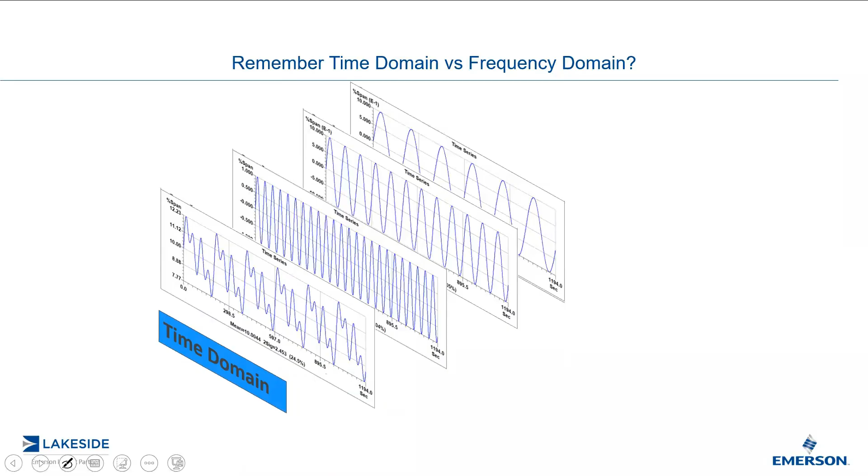So let's say we have this one cycle here, and then I'm going to add this cycle, and then I'm going to add this cycle at different frequencies. If I add them all up, this is what it would look like. And this is what we call the time domain. You take a look at it from a data set and the trend and so forth. That is the time domain.

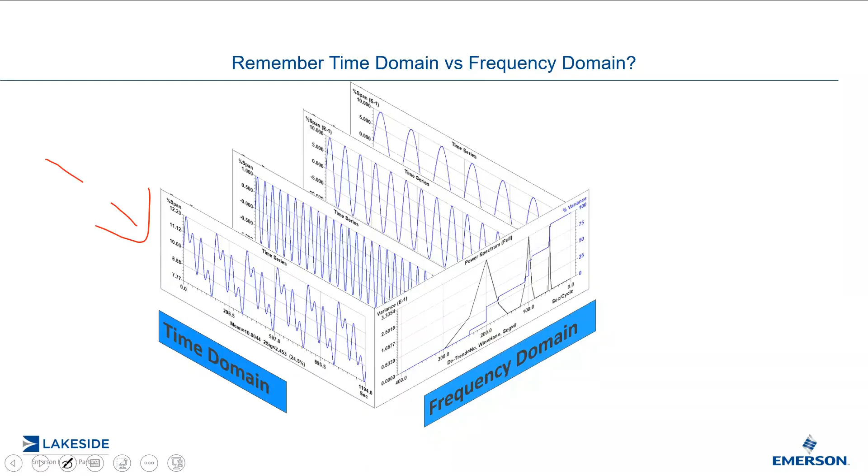However, we can look at that signal differently. We can take the power spectrum, a fast Fourier or full Fourier analysis, and that will break down this signal right here into fundamental harmonics. It was said that pretty much any time series can be reproduced by adding an infinite amount of sine waves and cosine waves of various amplitudes. And so here it'll break it down into various components. You can see the three major harmonics there.

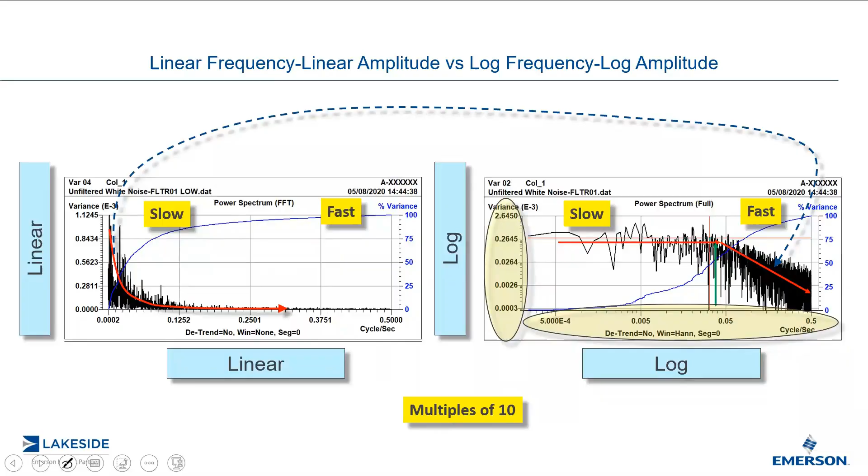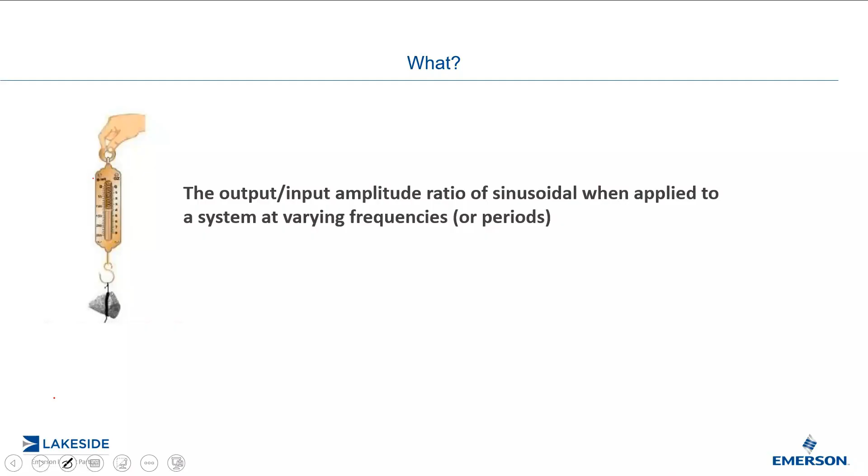So what is frequency response? Let's say I'm holding, now I know that looks like a scale there, I actually really wanted to have a spring, but I couldn't find a proper image, so just pretend it's a spring. So I will have a process input. My hand is going to move up and down, and I will observe how the rock will behave in terms of amplitude. And the ratio of the movement of the rock divided by the amplitude of movement of my hand will determine the frequency response as I vary the frequency or period.

It's interesting because we talk about frequencies, and really it is frequencies, but as I've mentioned in my previous webinar, in the field of process control we don't deal with hertz, we deal with seconds or minutes per cycle, which would be millihertz and microhertz. It just sounds better when we talk about 15 seconds, 15 minutes per cycle, as opposed to almost 1 millihertz.

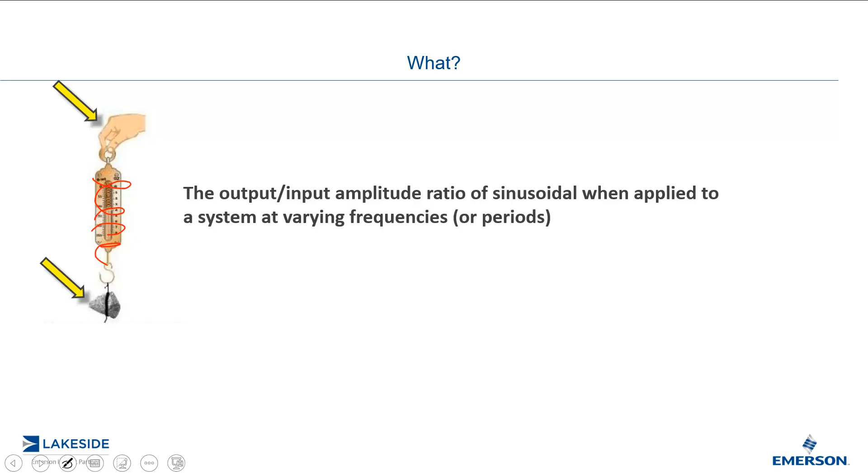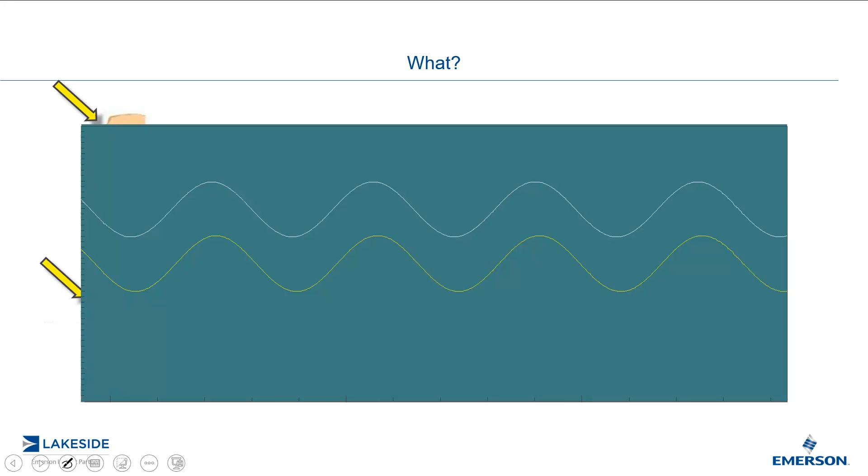So if I were to now move that system up and down, my hand is basically going up and down like the white line, and I would observe the movement of the rock. If I do it slow enough, they seem to track each other pretty well. So now we have a ratio of 1 in terms of amplitude. Now, if I change it a little bit faster, the rock is still tracking the movement of the hand, same amplitude, still a ratio of 1. A little bit faster, still pretty good, still tracking the movements of the hand in terms of amplitude.

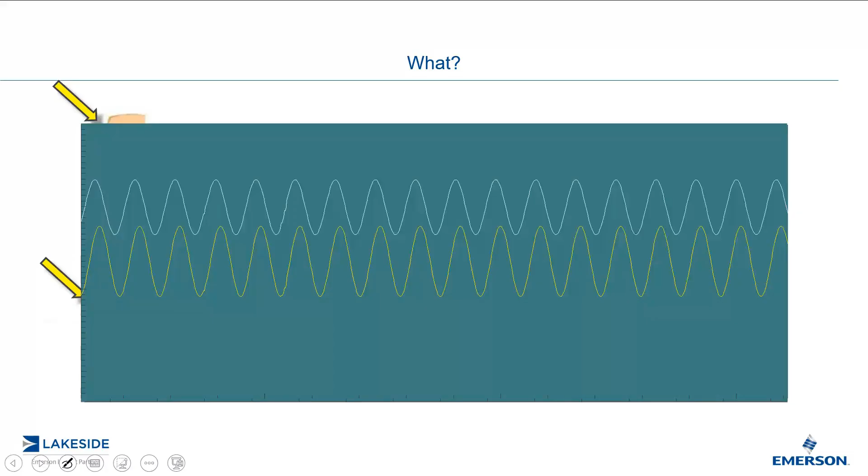Now, this is interesting. I'm moving a little faster now, but now it appears that the amplitude of the rock is greater than the amplitude of my hand movement. So now the ratio would be greater than 1. And if I go a little bit faster, now you can see the amplitude of the rock wave, that sounds pretty cool, is much larger than the amplitude of my hand. So now we have a ratio much greater than 1.

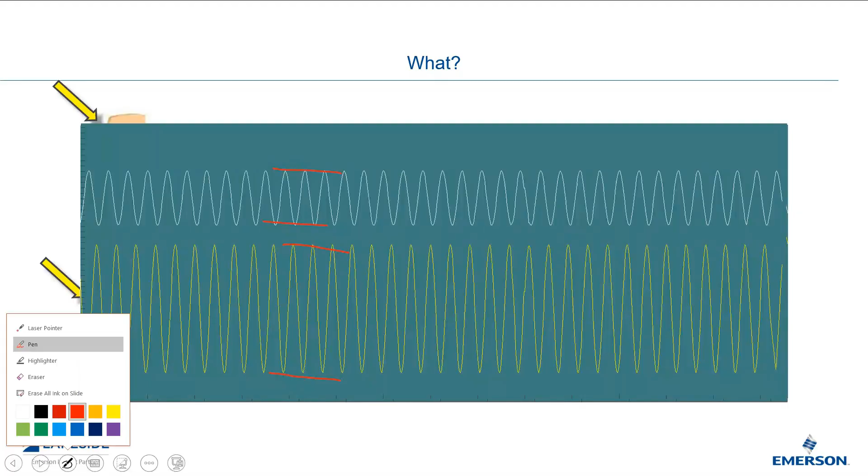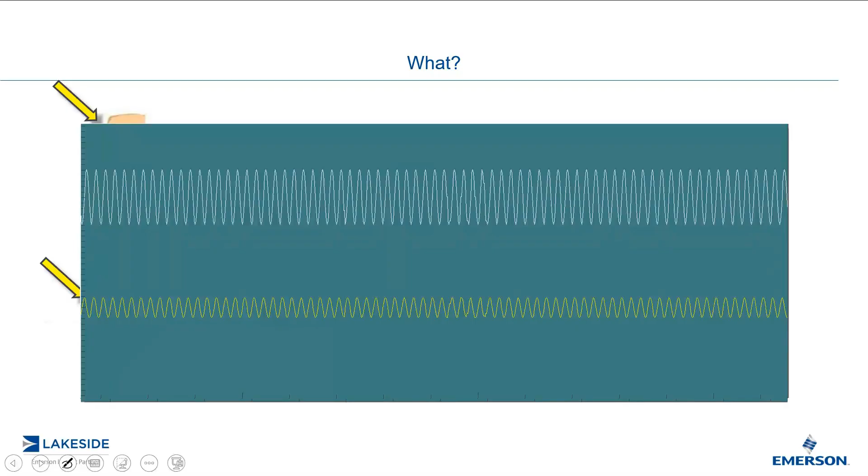That means at this point we're hitting a resonant frequency of the system. The system is actually a second order underdamped response, and we're hitting a natural resonant frequency. Now, if I keep going any faster, the hand movement is going really, really fast, but now the rock is no longer able to keep track in terms of amplitude of the changes effected by the hand, and therefore the amplitude ratio is much less than 1. We're falling down. So therefore the system is attenuating the input signal.

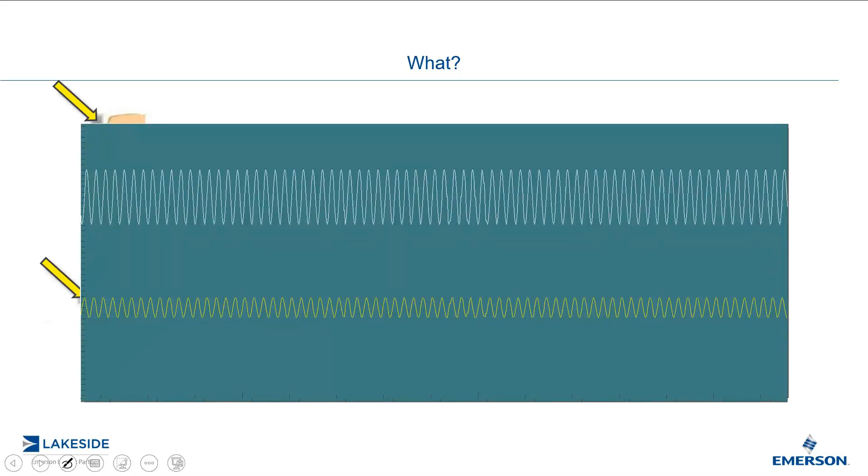Let's talk about filters, low pass filters and high pass filters. Some of you may or may not recognize this. Some of you may have little flashbacks of nightmare. This is an electrical circuit, and I have a resistor and a capacitor. This is known as a low pass filter.

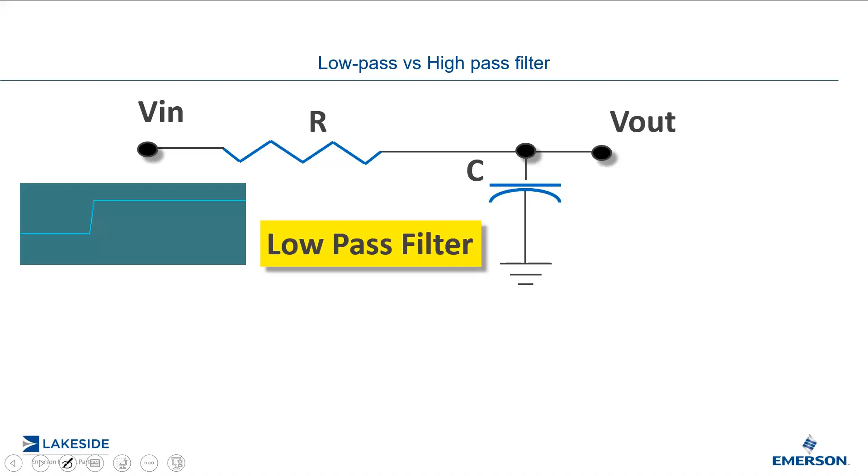So let's look at it from 2 different points of view. Let's look at it from the time domain point of view. If I were to put a step change on the input voltage, what would I observe at the output voltage? I would observe a first order response. Very, very similar to what those of you who've done tuning, or watched me do tuning, or taken my course know. The first step that we do before we do any tuning is a bump test to measure the process dynamics. So this is completely the same.

And yes, the time constant of that response, tau, is RC, the value of the resistance times the value of the capacitor. Now let's look at it from a frequency response point of view. So if I were to put some sort of signal generator at the input voltage, and I was able to vary the frequency, I would observe different amplitudes at the output.

In this case, you could see the frequency is pretty high, and what's happening is that the low pass filter is attenuating the input signal. And hence the name low pass filter: slower variability it will pass through. The amplitude ratio will be pretty much 1. But the faster the variability, the more it gets attenuated. And note my word attenuated, not eliminated.

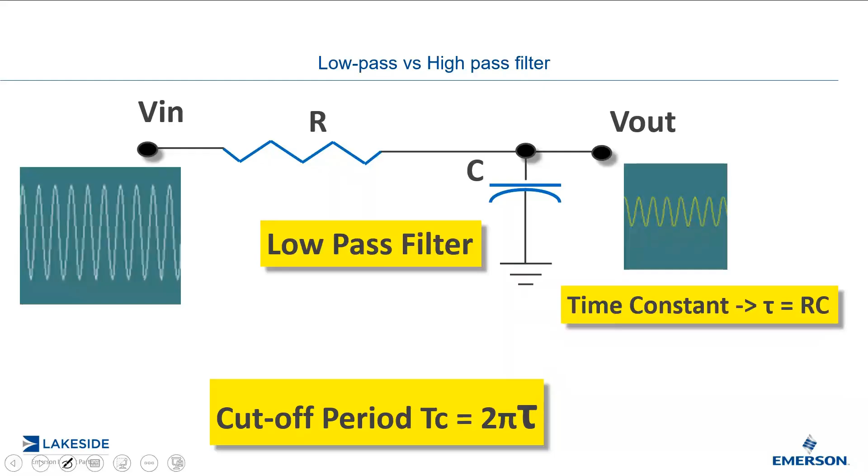It gets squished. And the cutoff period of this low pass filter is equal to 2 pi tau. And why the 2 pi? Because it's more than 1 pi? No, that's how we convert the time into radians per second.

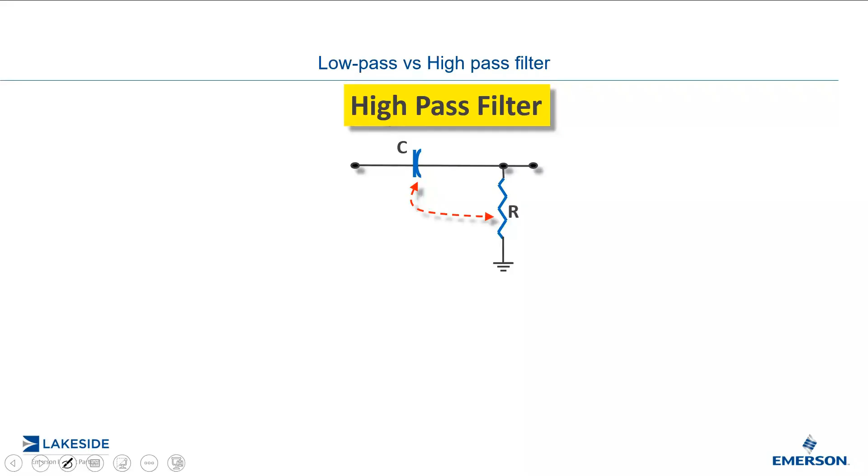So now let's talk about a high pass filter. The high pass filter is essentially where you just switch the positions of the capacitor and the resistor. And once again, if I put white noise through there, it's going to pass through the high frequency components of the white noise and attenuate the lower frequencies.

So you're wondering again, why do I need to do this? I went through the nightmare in university or college trying to forget all this. I'm going to relate this in a minute. So just to recap, a low pass filter attenuates high frequencies, and a high pass filter attenuates low frequencies.

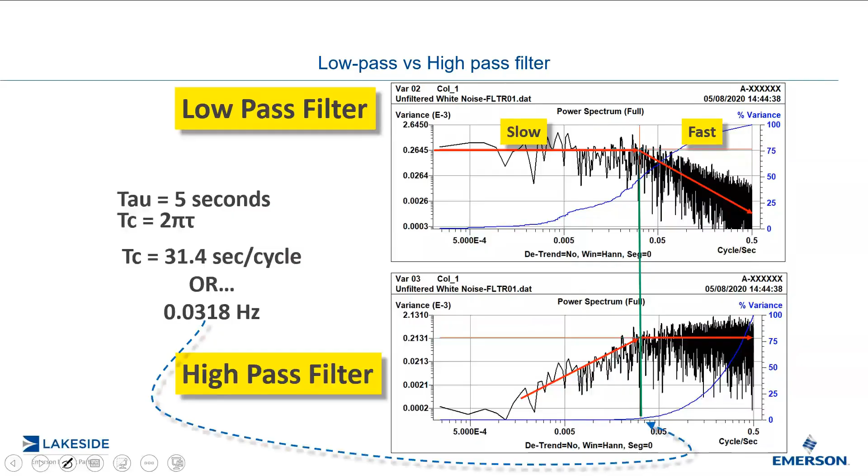So remember I talked about the cutoff period, and we're going to talk about it now for a high pass filter. So once again, for a high pass filter, the cutoff period in this example is 31.4 seconds per cycle, or 0.0318 hertz.

Now remember, our control loops are bombarded by all sorts. It's not necessarily going to be white noise, but it is bombarded by variability that can be from very, very slow types of variability: seconds, minutes per cycle, hours per cycle, days per cycle, seasonality, months per cycle, if you want to go all the way that far. But what does this mean in terms of cutoff period and attenuation? It means that

variability that is 10 times slower, variability at 314 seconds per cycle, 90% of that will be attenuated by the high pass filter. 90%. So if you think 90% at 314, that's over, what, 5 minutes per cycle. 5 minutes per cycle. 10% still makes it through. That's the key concept I want you to actually get.

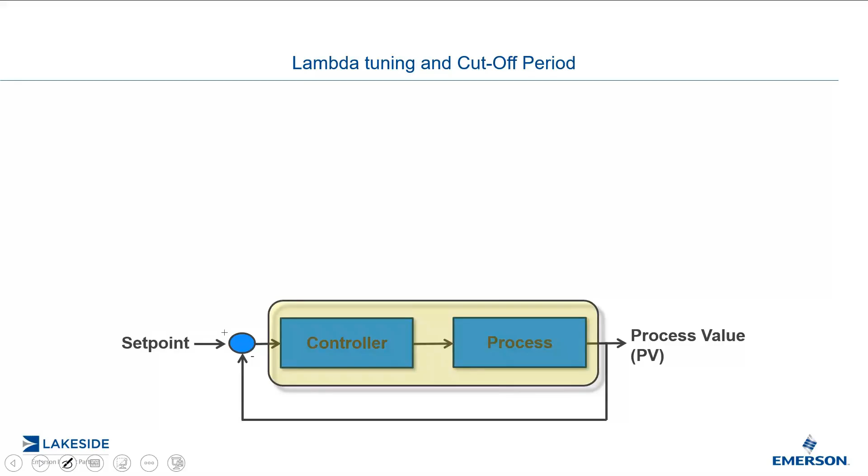So let's relate this now to PID and tuning. So when a controller is in automatic mode, it has specific numbers in tuning. The process obviously has its own dynamics, so we must consider this together. Depending on how we tune it, we can tune it to have overshoot. So it has a bit of overshoot and undershoot. That's known as quarter amplitude decay. It is an underdamped response, similar to the spring in the hand and the rock.

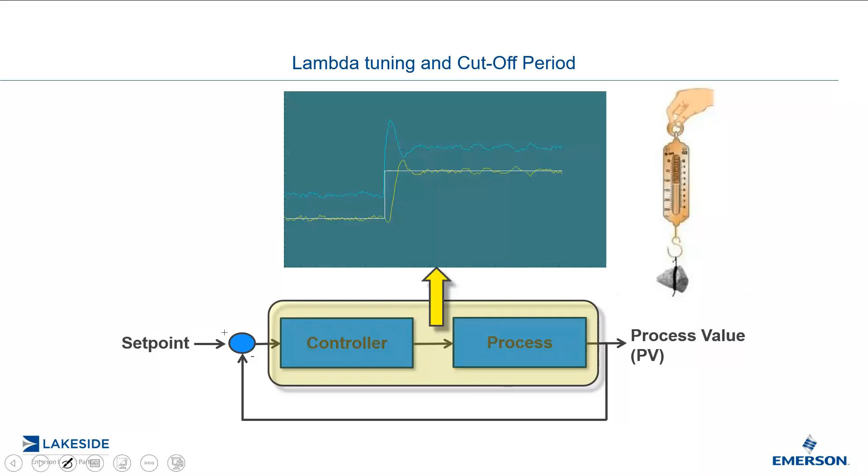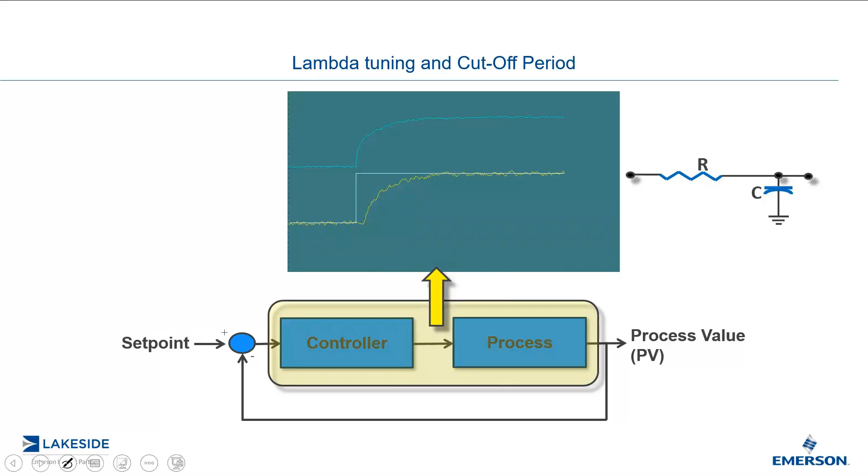Or we can tune it more like a first order response, more like the RC circuit following a set point change. So you can see here, this is the total sum of the PID and the process together. That is now one system. And now we can take a look at that one system and see what is the frequency response of that total system.

So let's say if I tune this with a lambda value of 15 seconds, that is known as the closed loop time constant. It's a fancy word; closed loop means in automatic. That's all it means. That means then that the cutoff period will be 94.2 seconds per cycle, or 0.0106 hertz.

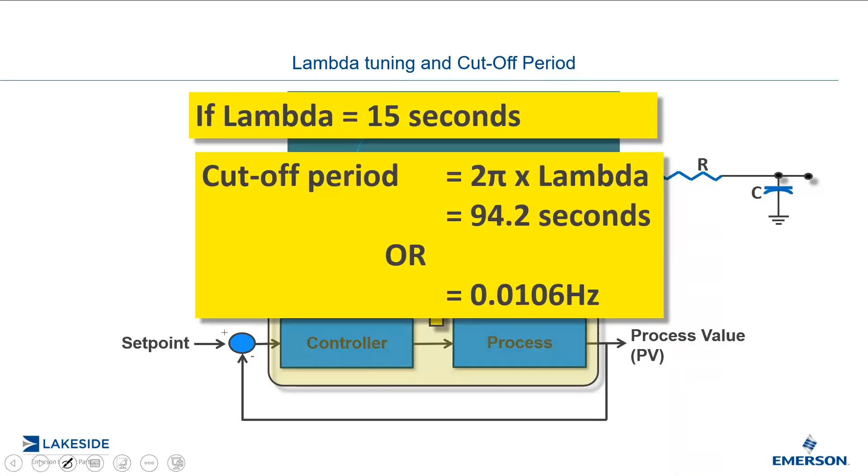That means that variability that lives at 942 seconds per cycle, 15.7 minutes per cycle, 10% of that variability at that frequency will pass through. It's quite amazing. It's a little bit hard to grasp that, but it's very true. 15 minutes is a long time.

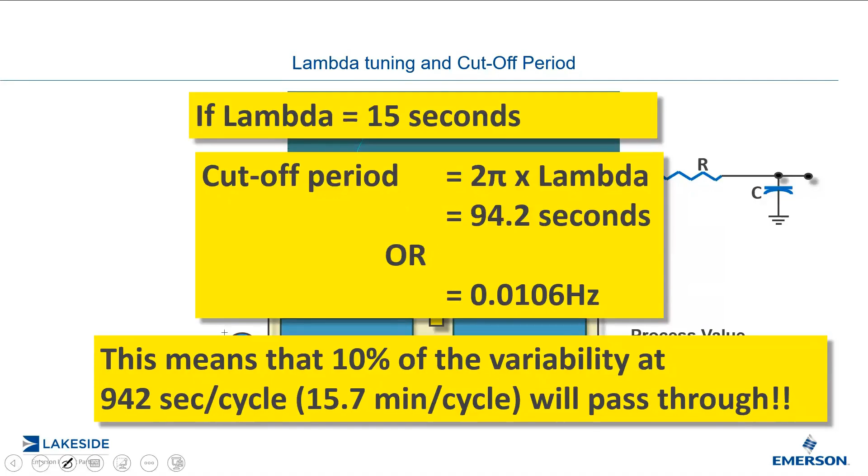And if I were to vary the set point very quickly, then the amplitude of the PV would be a lot less because it will have a hard time keeping up with the fast changing demand of the set point. My point here, from a set point change point of view, it's going to be a low pass filter, meaning slow set point changes will be tracked, fast set point changes will not be tracked so well.

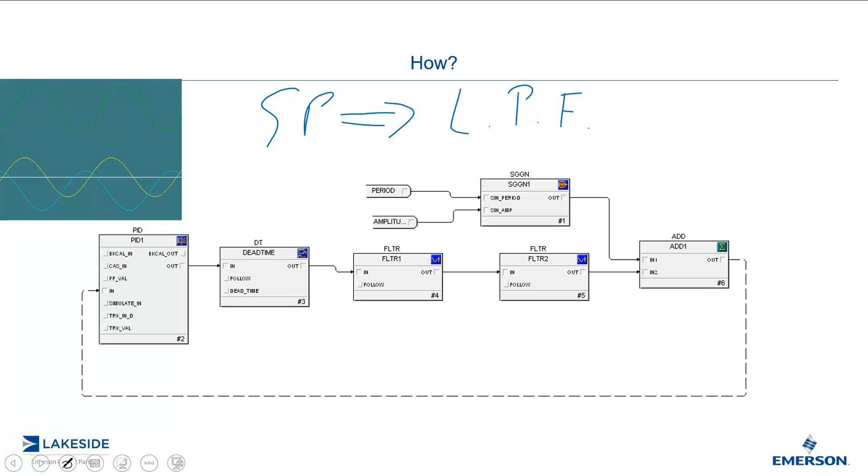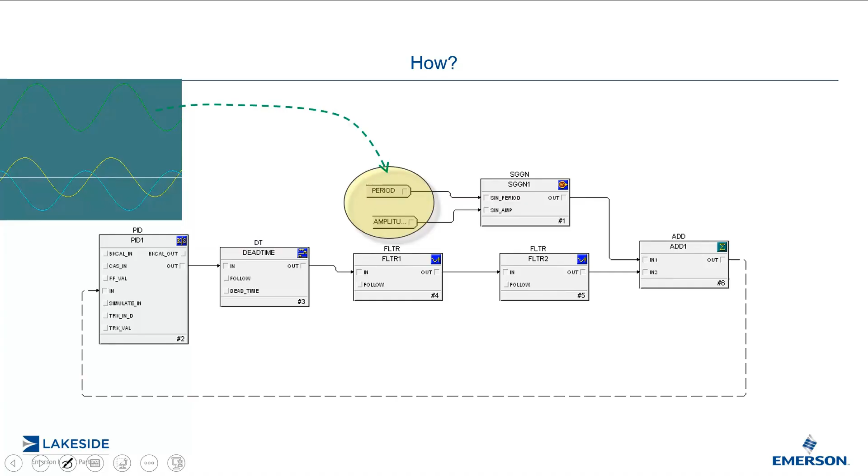But I'm interested now in the load rejection aspect of the PID controller. So what I'm going to do is change the period of that cycle, add that to my signal, and then observe how well my PID controller rejects the varying frequencies of load disturbances.

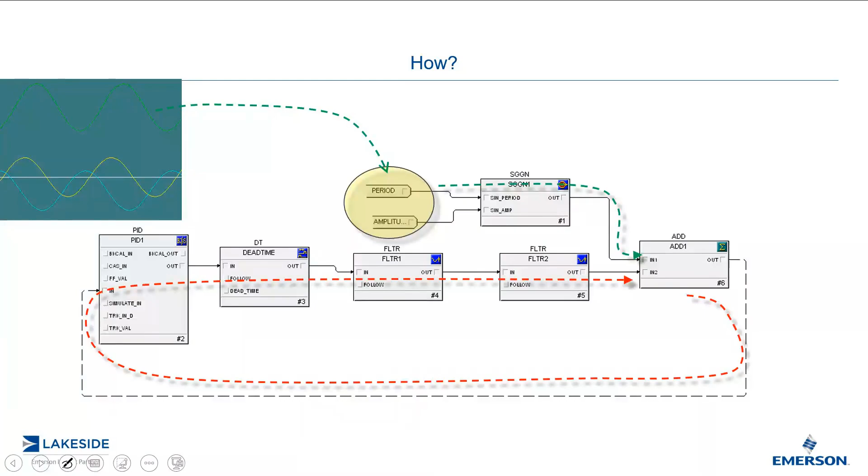So this is known as a high pass filter. From a load rejection point of view, a PID acts as a high pass filter. What does this mean? It means that if the variability is very, very slow, I have no problems controlling that out. But as the variability starts to increase in frequency, I'm less and less able to actually attenuate it, to a point where I will have no chance of attenuating and the variability will pass through.

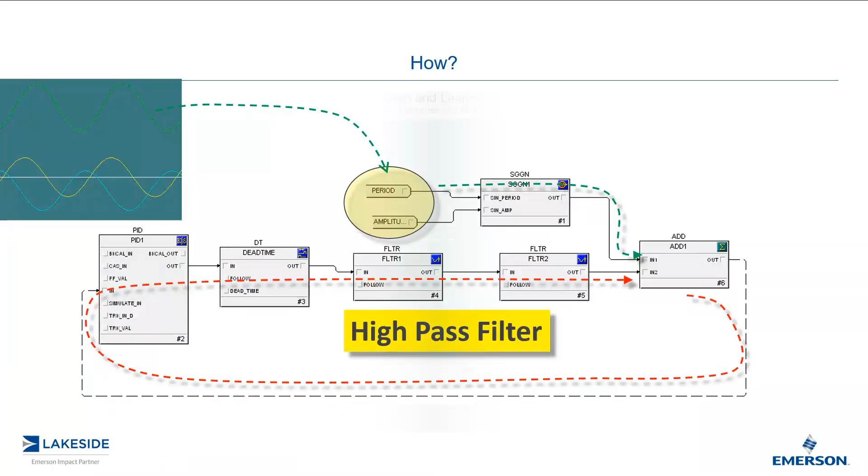So this is what I did here. I tuned this controller and I put it through a cycle of 2,700 seconds per cycle. This is all on the same time scale, all on the same Y scale. So here I measured this, I had a ratio of 0.05. That means that the cycle here was well attenuated.

So maybe I should go back and explain this a bit more. What I have here is the actual disturbance I'm injecting. The blue line you see is the output command of the PID block. The white line is the set point, and the very squished yellow line is the PV.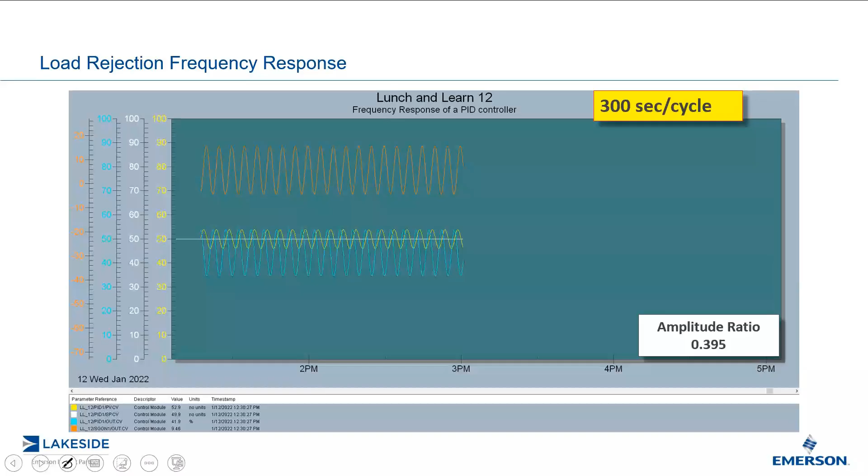400 seconds per cycle, 0.3. 300 seconds per cycle, almost 40% is making it through now. The PID controller is having a very difficult time trying to attenuate that cycle. 250 seconds per cycle, 0.465. 0.565 for 200 seconds. 150 seconds, 0.71. Now we're reaching the cutoff point, but something interesting is going to happen here. 100 seconds, 0.925. That means it's only attenuating 7.5%.

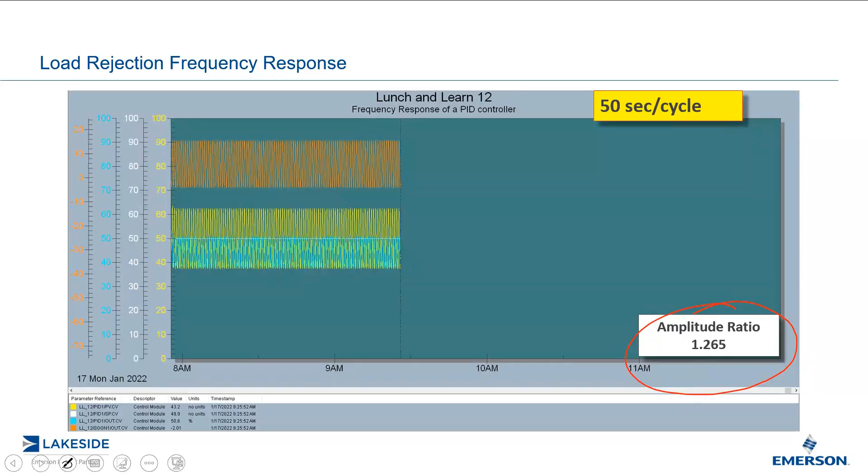Now, 50 seconds per cycle, this is interesting. The ratio is actually greater than 1. That means the PID controller is actually amplifying that cycle by 26.5%. The reason for this is that even though I tuned it as a first order response, I lambda tuned it, any process that has any kind of dead time will have some sort of natural resonance, no matter how you tune it. And this is what I wanted to show you here.

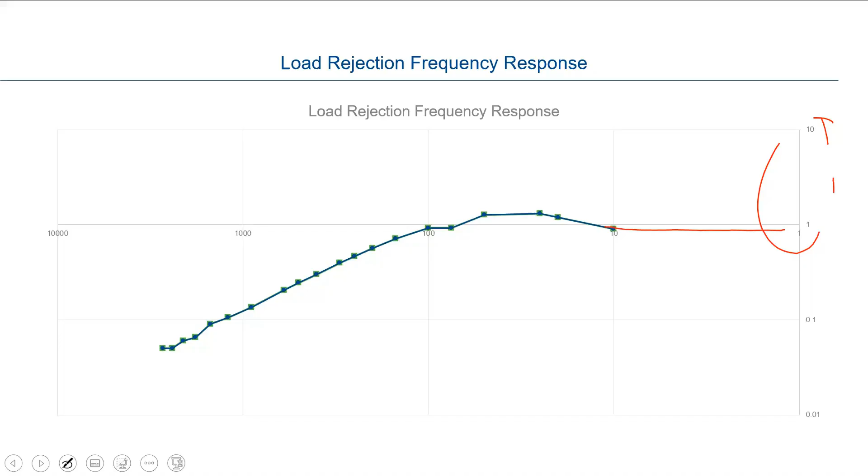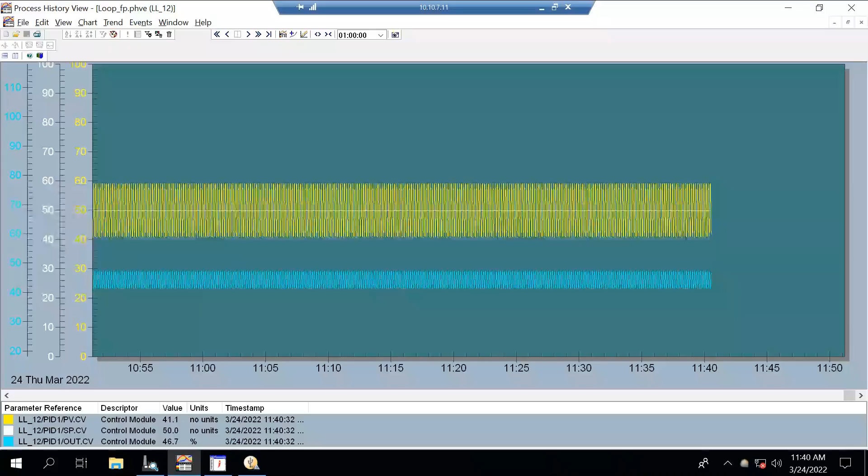So I got a bit of a demo going on here, just so you see it in action; it's always a bit more interesting. So this is the Lunch and Learn 12. Here I can change the amplitude. I'll leave the amplitude the same. And there it is at 10 seconds per cycle.

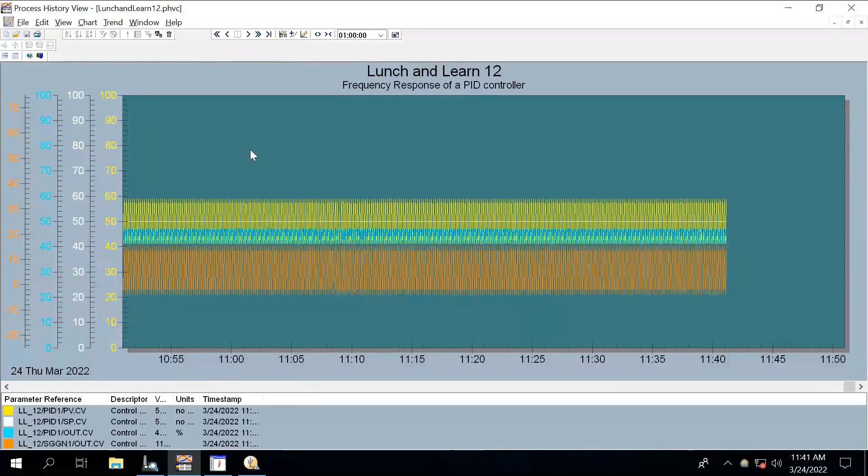And I started off where, actually, I think I have a better one here. Bear with me. Lunch and Learn signal generator, yeah. So there we go. You can see here, there's the amplitude of the sine waves. There's a bit of attenuation going on. This cycle is around, if I remember, 120 seconds per cycle.

And I changed the frequency here, and you can see that it's actually a little bit higher. The yellow line is a little bit higher in amplitude than the orange line, which is the disturbance I'm putting in there. Then I changed it to 10 seconds per cycle, and you can see that there's no change. The variability is completely passing through. The amplitude ratio is 1. So I just wanted to show you.

So if I go to the end here, what I can do is just change this to something very slow. I get back to 120. I'm not going to spend all day watching it, but you'll find that the PID will have an easier time controlling out that slower frequency.

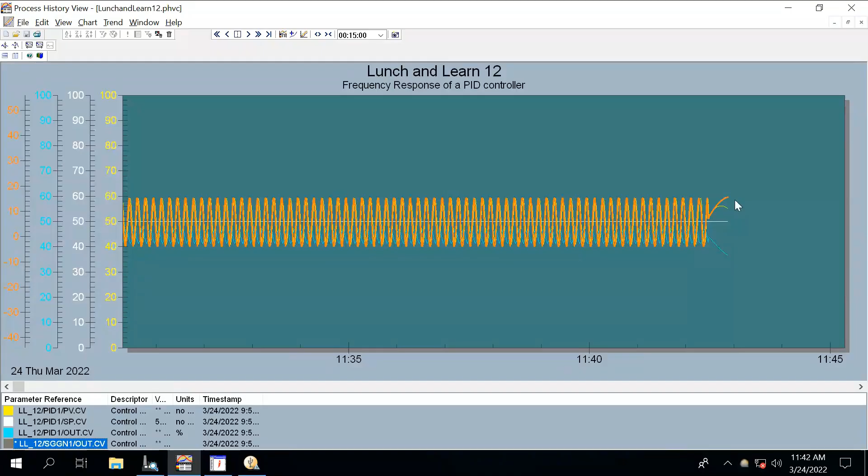And you can see already the amplitude of the orange line is higher than that of the yellow line because the PID is controlling that out.

Okay, so what does this all mean? Well, first message is that PID is not magical. It can control, but its capabilities are quite limited, and it's based on the tuning. As a matter of fact, I just showed you, especially with processes, depending on how you tune it.

If you tune a PID controller in an underdamped fashion, meaning there's set point overshoot and undershoot and overshoot and undershoot, it will have a significant resonant peak where it will actually amplify part of that variability. It's a little bit like driving a car with bad shock absorbers on a very bumpy road. And I'm sure right now, springtime, they're all pretty bumpy. So the car would tend to resonate at a particular frequency.

If you lambda tune it, that resonance is not as great. But if your process has dead time, it will resonate a little bit. But if you think that our process is subjected to all sorts of variability, as I'm displaying it here, a lot of times it's actually being bombarded more by slow variability. That's characterized by the slow drifting of that signal. And superimposed on top of that, there's a bit of noise. It doesn't really show up that much, but it's actually there.

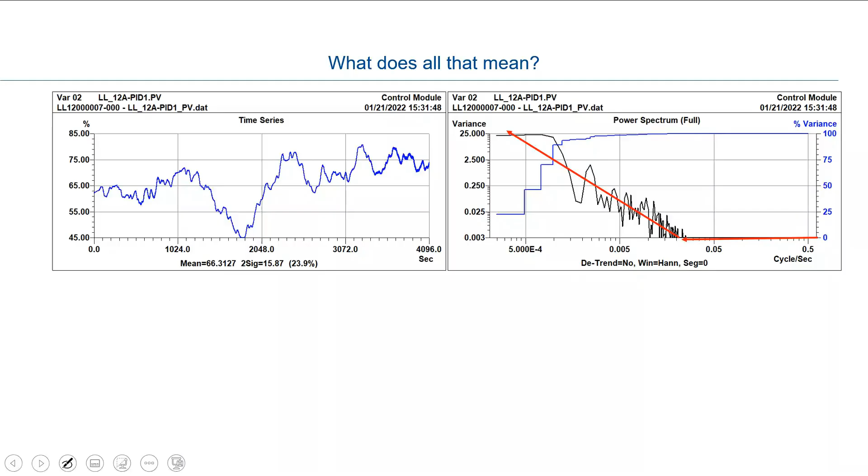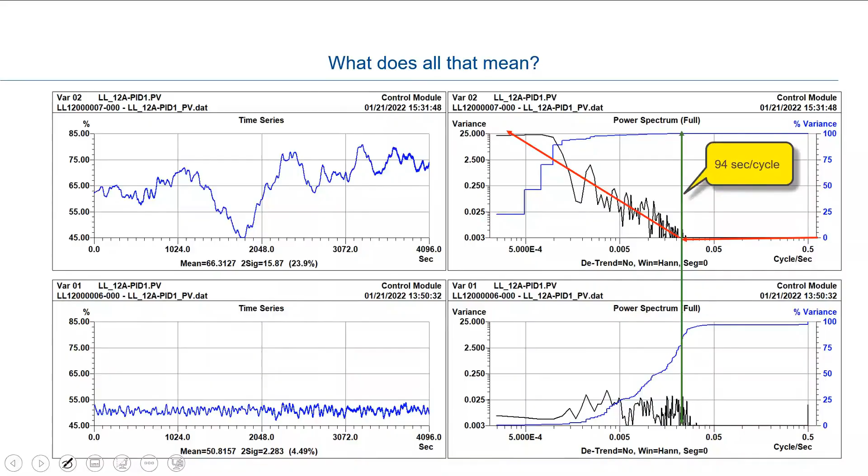And what does it mean? It means that most of your variability is actually slow. And if I were to tune it properly, because my PID controller is now a high pass filter, it will attenuate some of the slower variability and reduce process variability that way. That is what it means. So I hope I conveyed the message clearly that we not only must think of PID performance in the time domain, we must also think about it in the frequency domain as well.

So I'll put up here for questions. And I know that I do have one question already. The question is, what is the software you use to build your simulations? Thank you very much, Raphael. I use our control platform called Ovation. This is the Emerson platform that we, as Lakeside and all the Emerson Impact Partners, represent. It's called Ovation, a distributed control system.

So another question here. If you had a disturbance that was sinusoidal and you cannot get rid of the disturbance, would you change your tuning to be different from a typical set point tuning to attenuate specifically the sinusoidal disturbance? What I think you're asking there, Dean, is that if I have a sinusoidal disturbance coming into my process, maybe from some sort of slow rotary piece of equipment, to effectively attenuate that cyclical disturbance, you would have to tune it such that the cutoff period of your PID controller is 10 times faster than that of the cyclical disturbance. Now, depending upon the period of that cyclical disturbance, you may or may not be able to tune the PID controller to be 10 times faster than that. So that's something to consider. Good question, Dean.